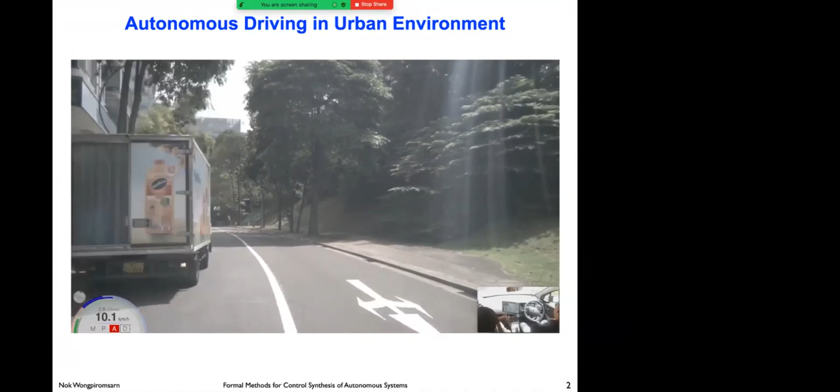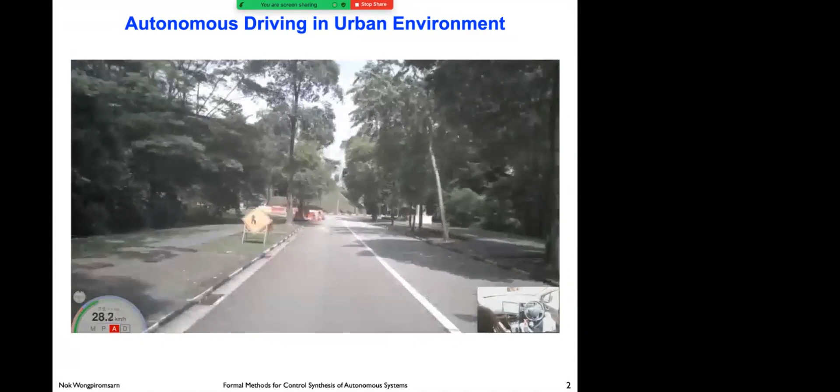And with an oncoming car that we need to yield for. So even with very light traffic, like what you saw in the video, there are already quite a number of interesting, complicated scenarios, like construction right in the middle of an intersection with a construction worker walking around. So we have to deal with all these complex situations.

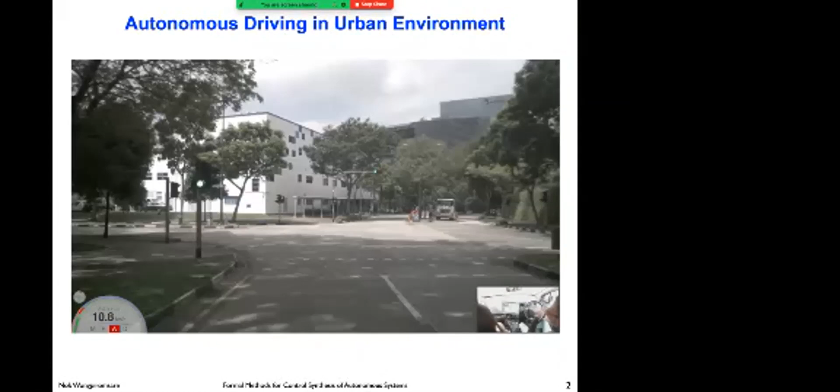And many more different situations that it will encounter. Now there are times that things do not go as well as in the previous slide.

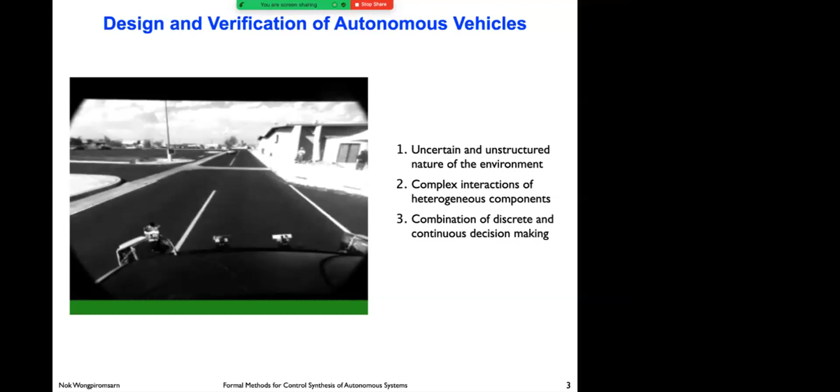Let me use the next video to demonstrate the challenges in designing autonomous vehicles, or autonomous systems more generally. This video was from the Caltech vehicle, Alice, in the Urban Challenge. I want to use this particular example, where she has to perform a left turn across busy traffic with a concrete barrier right after the turn.

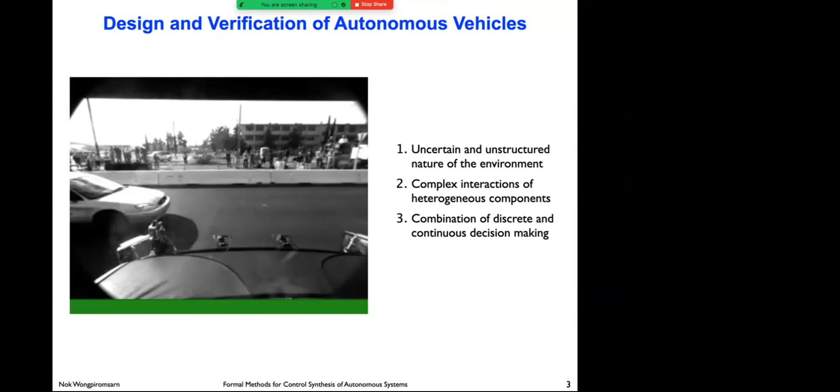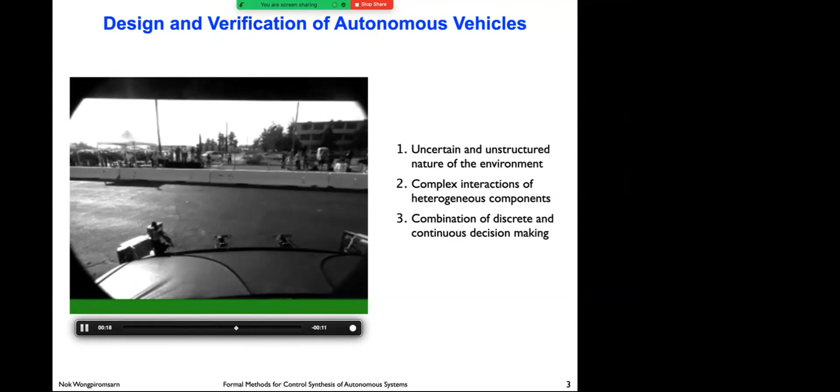You can see that the behavior she exhibits here is not quite ideal. The intersection is very busy, but she went through very slowly and at some point backed up right in the middle of this.

This illustrates what I would say are three main challenges of designing autonomous systems. First, uncertainties—the system has to deal with an environment that is uncertain and unstructured. What this means is there are a large number of scenarios that the vehicle has to handle.

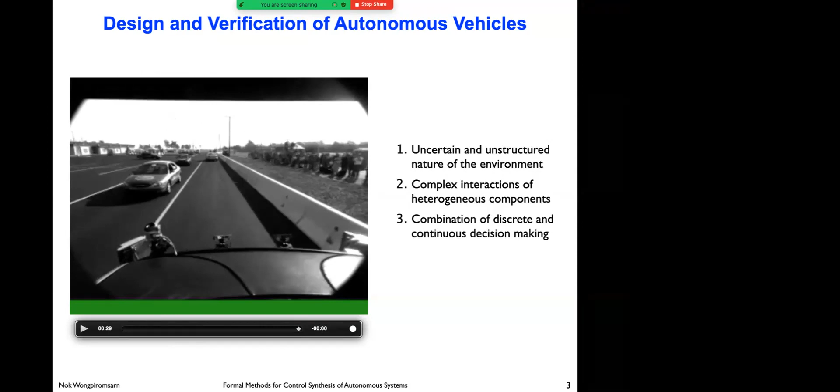In the case of Alice, we had tested merging, we had tested tight turns, we had tested driving next to obstacles—we just had not tested all of this in conjunction together. And you can imagine many other scenarios that you cannot possibly enumerate when you test the system. So that's the first point.

The second challenge is interaction. In the system we have many heterogeneous components—perception, planning, control, localization, and so on. Their interactions could be quite complex, and some of these interactions might only lead to bad behaviors under very specific scenarios.

This second challenge ties to the first a little, because there are so many scenarios we cannot test them all. So during testing, we might not detect all the bad behaviors that the system may exhibit.

In the case of the video you just saw, there were three components involved in the vehicle. We have the path planner that plans a path for the car to follow, and the safety system that would stop the vehicle whenever it deviates too much from the planned path and is about to run into an obstacle—a very typical safety system you even see in some modern cars today.

The last component is the steering control. In this case, we limit the steering rate at low speed to protect our physical steering system. If you think of these three individual components by themselves, each of them seems reasonable. It's just that in this particular scenario, they interact badly because the road the car has to turn into is narrow.

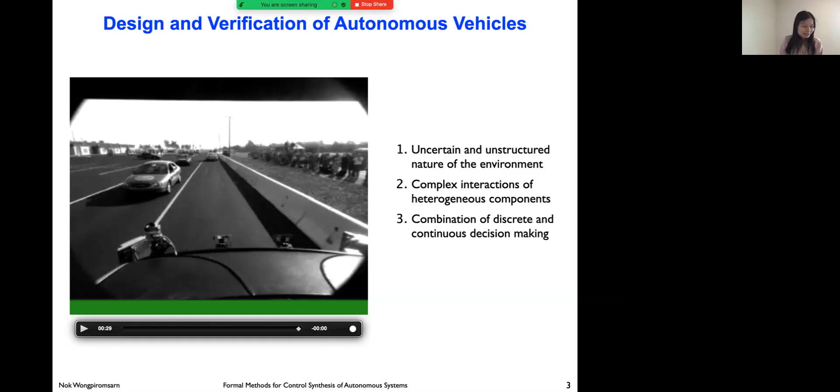So given that, even though the system is complex, we still want to be able to provide some guarantees, some correctness guarantees. With this, we look into applying formal methods.

We start with the model of the system, our own vehicle, and describe the requirements - what do we want the system to do. Besides this, we also need some assumptions about the environment. We might need to assume that other cars, to some extent, follow the rule of the road and do not try to just run into us. Otherwise we cannot leave our garage. So we need some assumption about what other agents could do. From this level, that is typically not formal, we try to formalize them into the system plus environment model.

This part describes all the feasible behaviors of the system. Some of this might not be desirable - for example, it is physically possible for a car to run into a person, it's just not desirable. On the other side, we have the formal specification. This formalizes what we want the system to do. Some of these behaviors may not be feasible, but they are desirable - like not running into a pedestrian could be the specification.

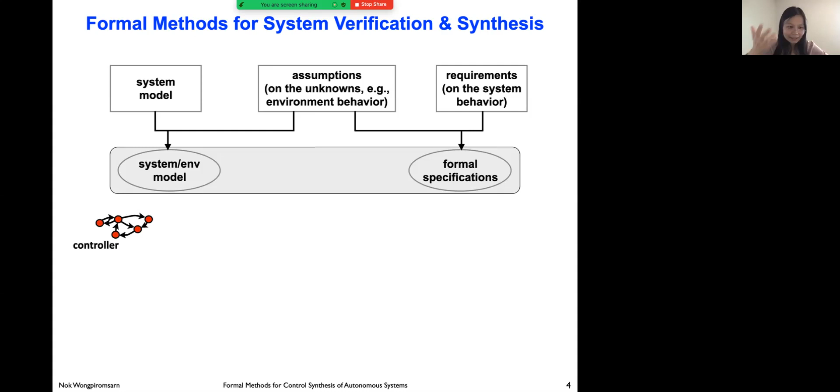Now, given the model of the system and the specification, we can, just like in the case of Alice, design the controller manually, and then we ask the verification problem: whether the composition of the controller and the system satisfies the specification. The answer we want from this process is either it's satisfied, in which case we get a certificate.

This is like when we want to prove whether a control system is stable - we can have a Lyapunov function, and that provides a certificate for the stability of the system. In this case we consider more complex properties, but there's the same notion of certificate. Otherwise, if the spec is not satisfied, the process could give counterexamples, so you can use that to debug the controller.

Now, what I think is a more attractive approach is synthesis. Instead of designing the controller manually, putting in all sorts of hacks like what we did with Alice, a better way is to ask: can we automatically synthesize this controller such that it, by construction, satisfies the specification? Or in case a controller does not exist - like for example our spec may say we want the car to go to the middle of the ocean, in that case it's just not physically feasible, so no matter how smart you are, you cannot find a controller to satisfy this spec. So this is a high-level description of formal methods.

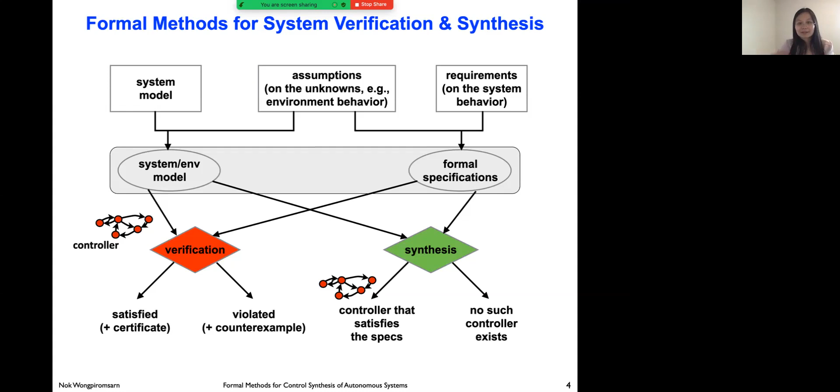Now let me go a little bit into detail of formal synthesis. This is where we want to construct automatically a controller that guarantees the specification is satisfied. I want to describe various formulations for synthesis, but instead of going into all the math and notation, let me give a very concrete example.

We have an autonomous vehicle here at the lower right corner - this is the system we are controlling. The car wants to make an unprotected left turn. There is an oncoming vehicle here that is not under our control, and also a traffic light - in this case it does not have a dedicated turn arrow. So we are making an unprotected left turn with oncoming traffic.

So given this system, one of the properties that we certainly want - we want to describe the properties or the behaviors that are correct. In this case we utilize a language called temporal logic, or specifically linear temporal logic.

In linear temporal logic, the basic building blocks are what we call atomic propositions. These are variables that can be satisfied at a given state. So here you see H4. This means human-driven vehicle, where H is in cell labeled 4.

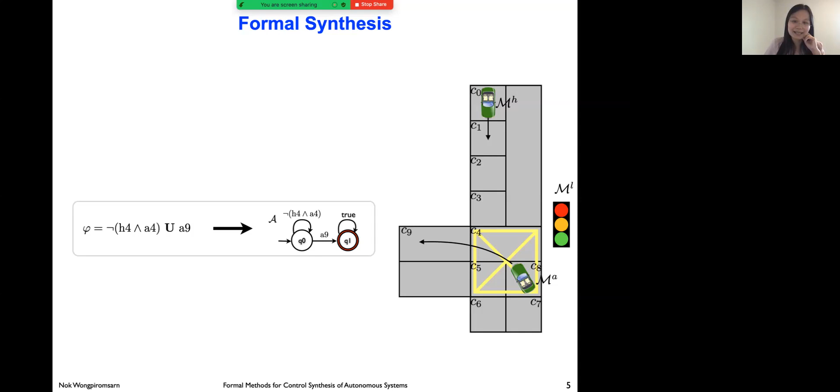So that means this oncoming vehicle is at this cell. A4, where A stands for autonomous vehicle, means the autonomous vehicle is also in C4.

We also use typical logical connectives like disjunction, conjunction, negation, and so on. So in this case, not H4 and A4 means there's no collision - the two cars cannot occupy the same cell in one state.

So far we only talk about a single state. The idea of temporal logic is that it extends this semantic to allow us to reason about a sequence of states. It adds temporal operators. One of them you see here, this is called the until operator. What this means is that whatever comes after until has to hold. So the autonomous vehicle has to be at cell 9 at some point in this sequence, and before it reaches cell C9, there is no collision between the two cars. This is what this formula is saying.

If you look into formal methods, then you know that there exists an algorithm to translate this into a mathematical object called a finite automaton, that is equivalent to this formula. I'll talk a little about this later.

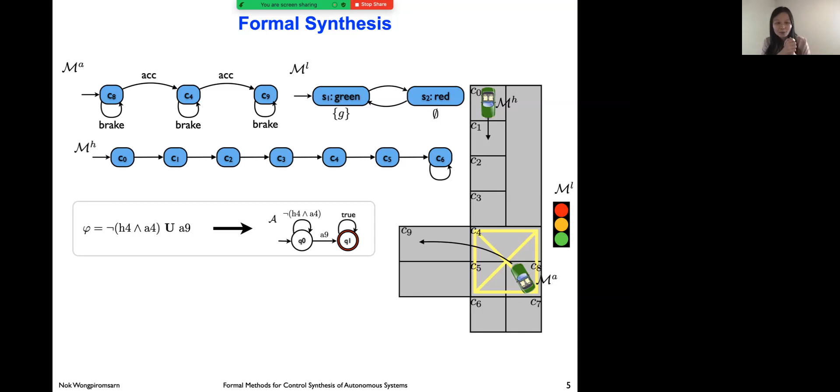So that's the specification. Now let me talk a little about how we could model our system. Depending on how we model our system, we arrive at different problem formulations. The simplest case is when we know exactly how the environment - in this case the human-driven vehicle and the traffic light - would behave. We know that the oncoming vehicle will just keep moving, moving to the next cell each time step, and the traffic light will keep switching between green and red.

The autonomous vehicle has two actions: accelerate would bring it to the next cell, and brake will keep it in the same cell. So in this case we have a deterministic system, meaning that once the autonomous vehicle chooses its action - acceleration or braking - the next state is uniquely defined.

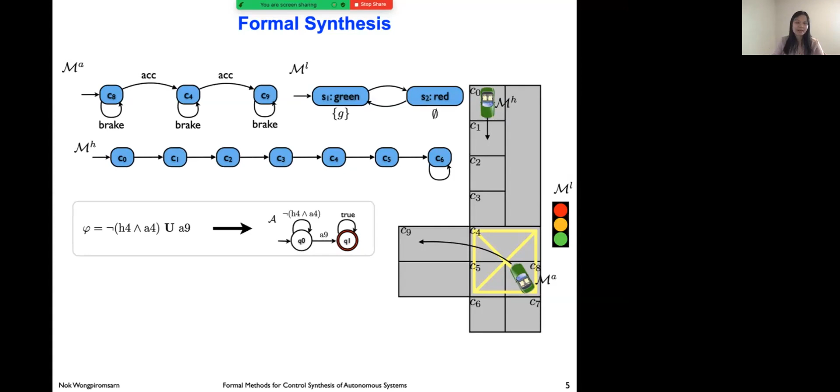With this deterministic system, we can formulate the closed system synthesis problem. The problem is to compute a policy or a controller for the system to satisfy the spec - we need to decide at each state whether to accelerate or brake, so that this spec phi is satisfied.

Now a more realistic formulation is that we don't know exactly how other agents would behave. The oncoming car would move to the next cell, or it could stay in the same cell in one step - we don't know exactly what it would do. So we would formulate a different problem, in this case a reactive synthesis problem.

Here we want to compute a policy so that the specification phi is satisfied regardless of what the environment does. Whatever actions the human-driven car or the traffic light choose in one step, we can guarantee that the spec will be satisfied. So this is more like a game formulation of the problem.

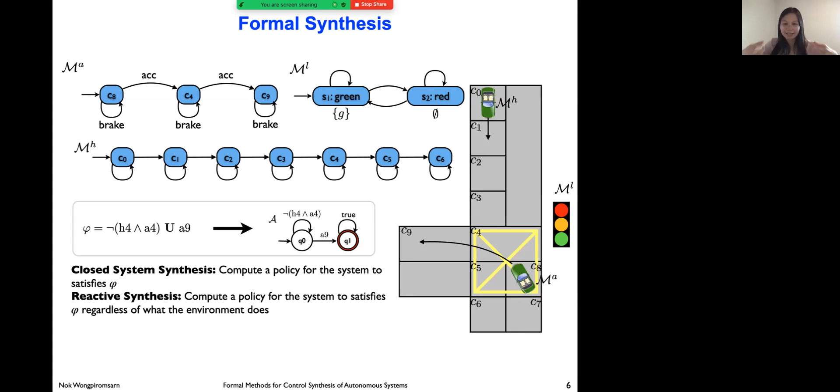Now the last formulation is when we know a little more about how the environment would pick their actions, in the sense that we can put a probability on each of the transitions. For example, we know that the human-driven car will move to the next cell with probability 0.8, and stay in the same cell with probability 0.2. In this case we could formulate a probabilistic synthesis problem, where the goal is to compute a policy to maximize the probability of satisfying the spec.

We can even extend this formulation to handle the case where the environment is not fully observable - we might not be able to observe the intent of the oncoming car. In that case, the problem would be maximizing the expected or worst case probability of satisfying the spec instead. So we have these different formalisms in different papers, and if you are interested you can take a look at this.

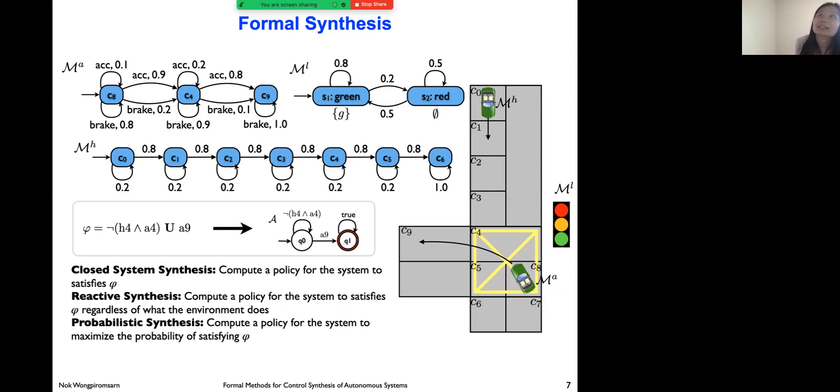Now, the major problem with all these previous formulations is that they treat autonomous vehicles as subject to many different rules of the road, and the problem is that in all three formalisms I described, they treat all the rules equally. It's either you satisfy all the rules, or if you break one rule, it's about as bad as breaking all the rules.

So what that means is if you already forgot to turn on your turn indicator, you might as well just run into a person. That's what the previous formalism would suggest.

So to account for unequal importance of traffic rules, we propose this notion of prioritized safety specification. It includes 4 elements. We have pi, which is a set of atomic propositions. This is like a typical temporal logic formulation.

Besides pi, we also compose these atomic propositions into formulas. In this specific case, I'll use FLTL. The syntax is exactly like LTL, but it is evaluated on a finite sequence rather than an infinite sequence of states. Each rule would correspond to one formula in this big phi set.

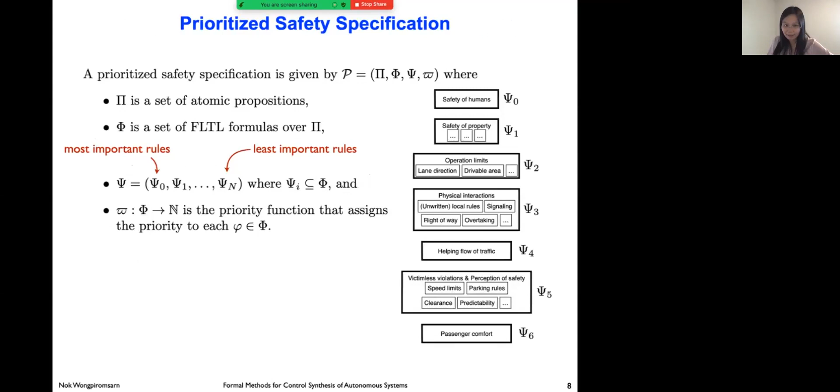Okay, so let me talk a little more about how we would describe the rules. I mentioned that we can use general finite LTL formulas. But as it turns out, if you go through the typical rules of the road, most of the rules are quite simple. We don't really need the full power of LTL to express those rules. So in this work, we come up with a subclass of finite LTL, and we call it si-FLTLGX formula. Si stands for stutter invariant.

Roughly what it means is that the correctness of the formula is not affected by duplicating a letter in a word or removing some duplicate letter. This is a very important property when we deal with continuous systems.

Besides being stutter invariant, we also consider that the formula has to be in a certain form - it's a safety formula. We use the always symbol. So from temporal logic, this square means p of x has to hold for the whole execution. We also constrain p of x to only contain p, which is an atomic proposition. We also allow next p, where p is an atomic proposition, and we allow all the typical logical connectives. These are all that we allow to specify the rules that we consider.

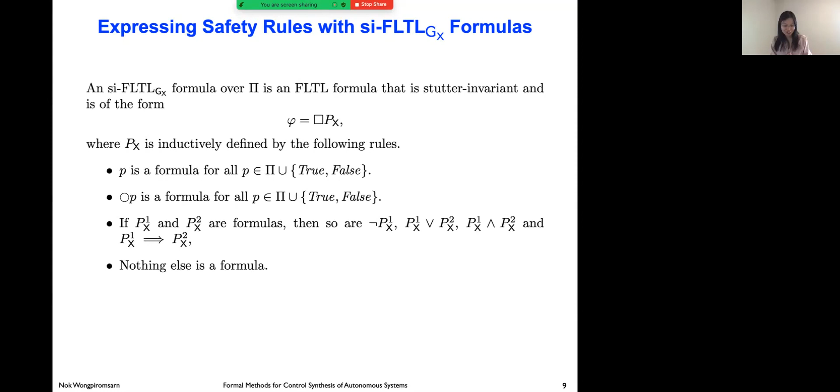All right, so I have talked about how we formalize our requirements. Now let me get back to how we model our system. We consider a dynamical system that can be described by a differential equation, x dot equals f of x and u, where x is the state and u is the control signal.

We have the notion of a finite time trajectory, which is a map from time instance to the state, such that there exists a control signal u that satisfies this differential equation. So this is a finite time trajectory.

To be able to reason about a trajectory, we also introduced the notion of a labeling function. The labeling function takes a state and returns the set of atomic propositions that are satisfied at that state.

An atomic proposition, an example would be, stay within a lane. So the state is within a lane. Given a single state, like a position and orientation of the rear axle of the car, we could determine whether the bounding box of the car is within a polygon that represents a lane or not. That's the labeling function, it takes a state x and returns the set of all the propositions that are satisfied at this state.

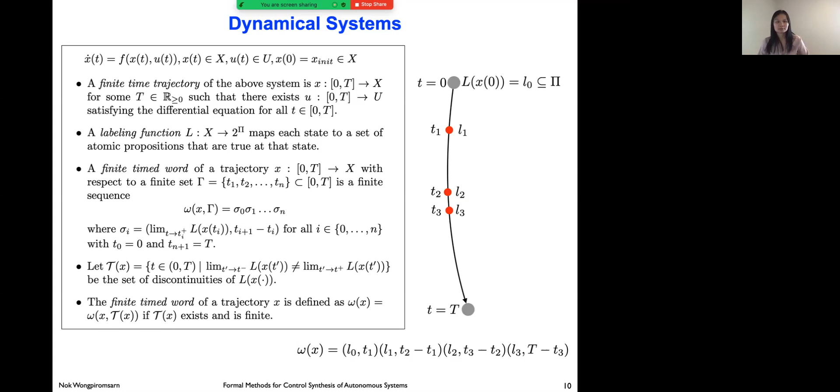So now that we've defined the notion of finite timed word, we can define, with respect to each si-FLTLGX formula, the level of unsafety, which is also the notion of the amount of violation of rule phi.

The formula is as follows: we go through this sequence and look at the consecutive pairs of labels. If they satisfy the formula, we don't penalize it, because it's correct. Recall that because PX only includes one next operator, it cannot be nested, so it's sufficient to determine the correctness of PX by only looking at two consecutive labels. So if the pair satisfies PX, then we don't penalize it.

Now if this pair violates PX and it corresponds to visiting an unsafe state, we would penalize it by the duration where this happened, the duration of Li essentially. And if it corresponds to taking an unsafe transition, we would penalize it by 1. So this is a very specific form of penalty. Later in this talk, I'll describe how we could generalize this to other forms of penalty if we want.

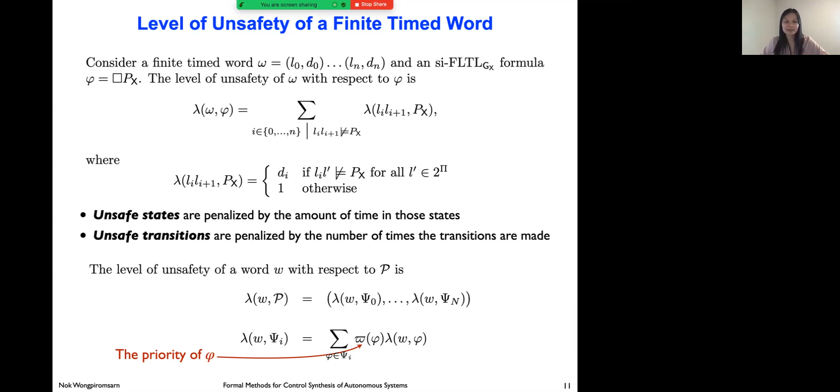Now we have all the elements we need to define the problem we call minimum violation planning. We are given the dynamical system, x dot equal f of x and u. We are given the label of a goal state, which we can think of as one atomic proposition in the set of all atomic propositions, so there could be multiple states we consider as our goal. And we also have a prioritized safety specification, with all the rules organized in a hierarchy.

The problem is to compute an optimal trajectory. What I mean by optimal is the first criteria: we want this trajectory to end in a goal state. At the final time of this trajectory, the goal has to be within the label of the trajectory at that time. That's the most important one.

The second criteria is that among all trajectories that end in a goal state, we want to minimize the level of unsafety with respect to this prioritized safety specification. The third criteria is that among all trajectories that end in a goal state and minimize the level of unsafety, we want to minimize the amount of time for the trajectory to reach the final state. So this is what we mean by optimality in this case.

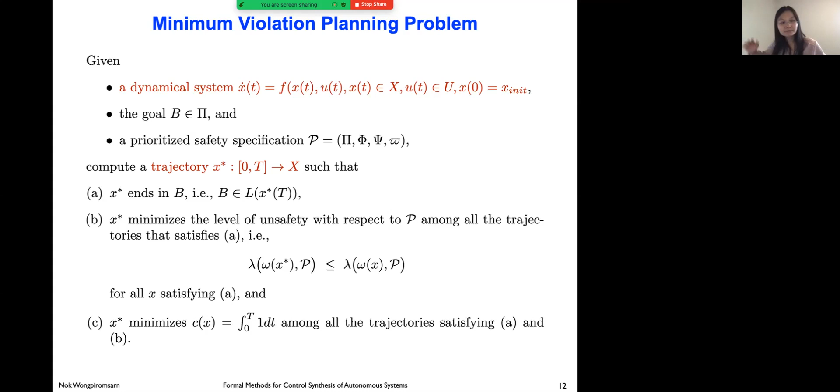Solving this problem involves two big challenges. First, we have a pretty complicated spec—not just safety, like invariant or stability as often considered in typical control systems. It considers traffic rules or rules of the road. The other challenge is that we have a system with an infinite number of states.

To solve this, we split these two challenges. The first thing we do is abstract our system into a finite state system. In the literature, there are two main approaches for doing this. The first is to rely on gridding the state space into a finite number of grids or cells, and each cell would correspond to one state in the finite abstraction. That means one state in the abstraction corresponds to an infinite number of states in the original dynamical system.

Another approach, which we call concretization and which I will utilize here, is based on sampling the state in the original state space, and building this abstraction based on these sample states. To make sure the abstraction is consistent with the original system, we need it to be simulated by the original system. That means if there exists a transition in this abstraction, there must exist a control signal in the original system that mimics this transition too. This is the notion of abstraction and simulation.

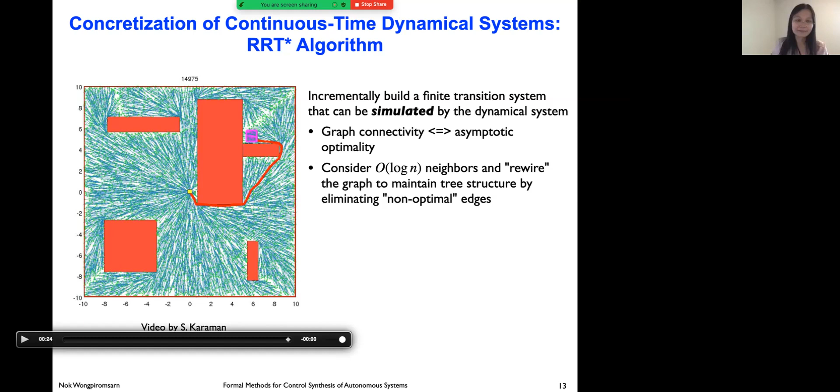Okay, so now how do we compose all this that I just talked about to solve the minimum violation planning problem? If you come from formal methods, the first thing we would think about is, let's just translate our LTL spec into a finite automaton. The problem with that is the size of the automaton in the worst case is exponential in the length of the formula. In autonomous driving, we have to deal with a large number of traffic rules, and if each rule is already exponential in length, composing them gives us a state explosion problem. So our solution is to avoid this problem.

Instead of doing this translation, we translate the original si-FLTLGX formula over pi, where pi is the set of atomic propositions, into an invariant formula, always P, over the product of pi. Here P is just a proposition, and this always-P becomes an invariant formula, which is much easier to deal with, since we don't have the next operator to take care of anymore. This translation is quite simple: we replace each instance of P in the original formula by a pair (P, true), and we replace each next-P with (true, P). So now our formula will be over pi times pi.

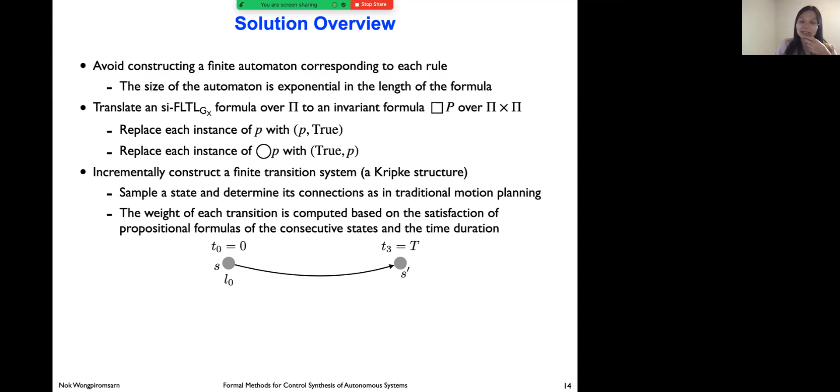In typical motion planning, the cost is basically either the length or the time. In this case, we want the cost to reflect the amount of violation of the rule. So we know the end time of this transition—that's just typical motion planning. What's additional is we need to look at the labels along these transitions. We start with the label of the first state, figure out along this transition where the label or properties of the state change, and mark those time instances. When we compute the violation subject to a particular rule, we look at the consecutive labels.

If the label pair, Li, Li plus 1, satisfies P—now P is just a propositional formula—if this is satisfied, we don't penalize it. If this corresponds to visiting an unsafe state, we penalize it by the duration, and otherwise we penalize it by 1. This definition corresponds exactly to the definition of level of unsafety we defined earlier.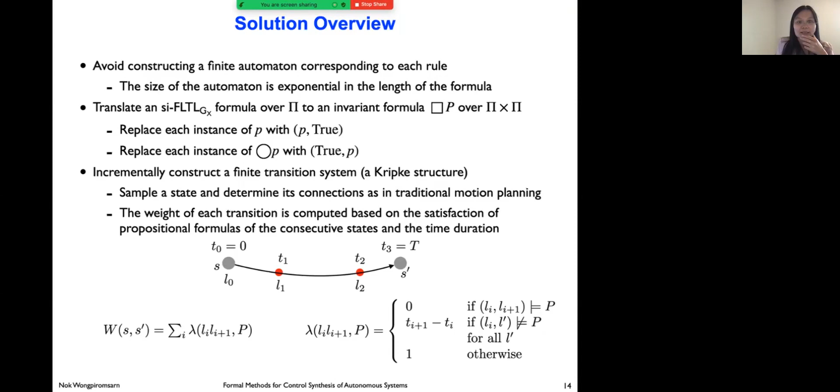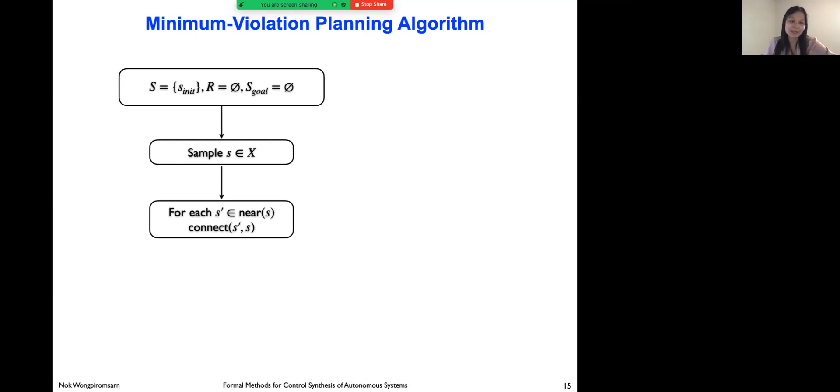Now let me give a high-level overview of the algorithm. We start with the initial set of states being just the initial state, no transitions, and no goal state yet. We sample a next state, a new state S. We connect from an existing state S' that is in the O(log n) nearest neighbors of S, and we connect S' to S. The next step is we connect S to S'.

So that's the reverse edge. If we just want to use RRG, connect mainly just creates a transition—so connecting S' to S means creating a transition from S' to S, and here creating a connection from S to S'. Now, if you want to use RRT* instead, to make the abstraction lighter with fewer transitions, we will only add a connection if it actually improves the cost, and we also need to consider rewiring.

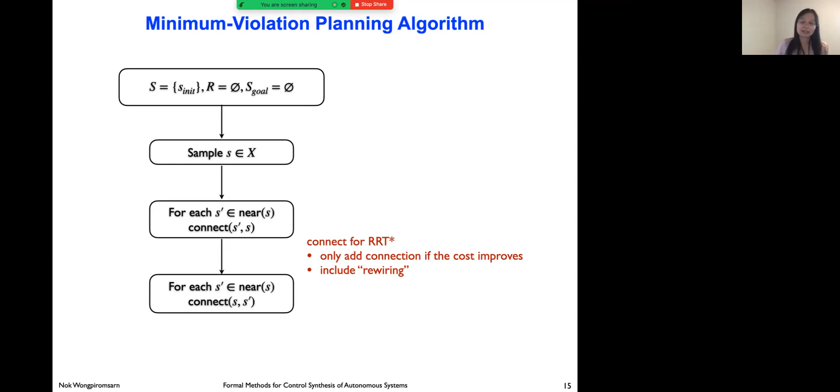The final step is to update the set of goal states in case the new sample state belongs to the goal. We can just keep going through this loop until we run out of computation time, and at the end we extract the optimal path from the graph we have. So that's the complete algorithm.

And as I said, because this connect operation can be defined generally, you can have this part as the template of the algorithm, and then you can define a version of connect for RRT* and another version for RRG.

And that would give you the flexibility of which algorithm to use.

Let me discuss the theoretical guarantee we can provide. As in the RRT star or RRG case, we can ensure asymptotic optimality if P is a propositional formula. So if we start with just the invariant property, we can ensure that the optimal solution from the abstraction converges to the original solution with probability 1.

The other property we can prove is the computational complexity. Assuming that computing the label is O(1), the algorithm has exactly the same computational complexity as RRT star and RRG, that's O(n log n). Because RRT star and RRG have demonstrated to run very efficiently in real time, it's easy to implement our algorithm to run in real time as well.

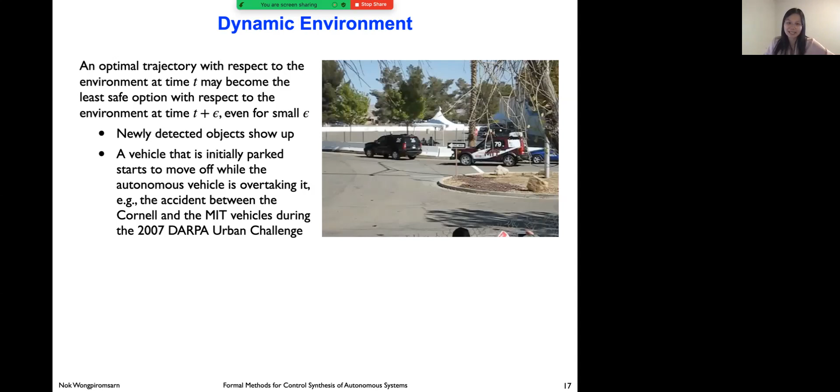This could happen, for example, when newly detected objects show up. Or a real case that actually happened and caused the first accident between two autonomous vehicles is that a vehicle that was initially parked started to move off while an autonomous vehicle was overtaking it. You can see in this video, originally the optimal trajectory is to get back into the lane, but then the parked car starts to move, and so getting back into the lane would be one of the worst things you want to do, because that would lead to a collision like what you saw in this video.

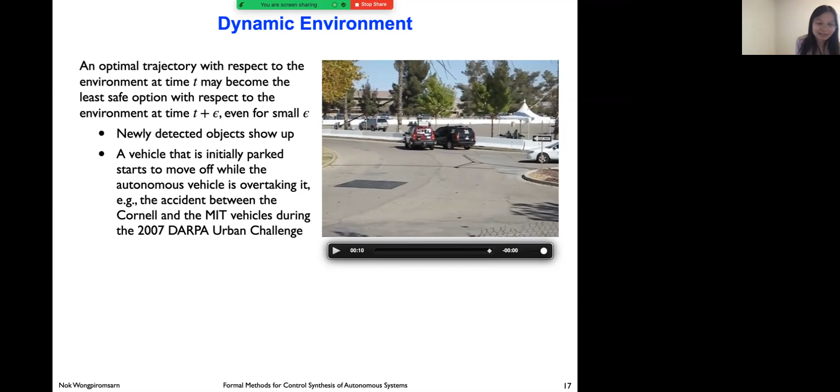By applying the minimum violation planning, and because it's quite efficient, we can do real-time replanning in response to a quickly changing environment. We keep evaluating our environment and keep adjusting our trajectory. So to some extent, this approach is better at handling unexpected or unmodeled environments compared to other synthesis techniques like reactive or probabilistic synthesis.

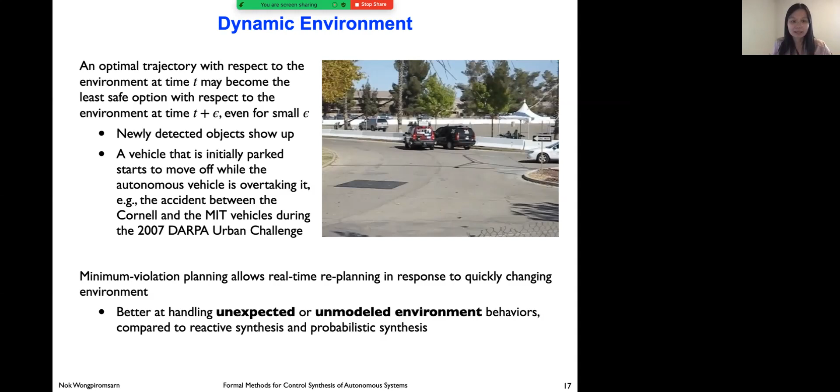To be able to enjoy this benefit of real-time replanning, one of the properties we want to ensure is the richness of this abstraction, the richness of the graph. We want to make sure that we maintain many different options in the graph, instead of just the optimal one, because the trajectory that is optimal now may be the worst trajectory in the future. So we want to make sure that the options in the graph are diverse.

And we don't have infinite time for the system to converge to the truly optimal solution, so we have limited computation time. Instead of reconstructing the graph every time the planning cycle runs, we maintain the graph from the previous iteration, but we need to update our initial state to correspond to the current state. And we update the transition cost based on the current state of our own vehicle and also the most recently observed environment, whether the parked car is moving or not.

In practice, RRG-based algorithm would be more preferable, because RRT star only maintains optimal edges, but optimal edges at time t might not be optimal anymore at time t plus epsilon. So RRG is often better in this case in practice, even though it needs more time to construct and maintain.

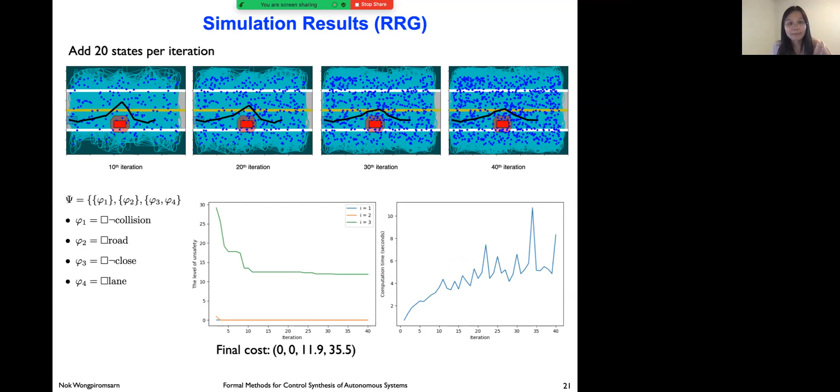Let me summarize the 4 different formal methods approaches when applied to autonomous systems. Closed system synthesis deals with deterministic systems. Probabilistic synthesis and reactive synthesis - one deals with probabilistic systems and the other deals with a non-deterministic adversarial setup.

Minimum violation planning deals with deterministic systems, but relies instead on real-time replanning to respond to changes in the environment. Here we want to minimize the amount of violation. In other cases, like closed system synthesis, we just want to satisfy the spec. In probabilistic synthesis, we want to maximize the probability of satisfying the spec. Reactive synthesis is where we want to satisfy the spec regardless of what the other agents are doing. So as I mentioned, the one key benefit of minimum violation planning is its online, any-time nature, which allows it to respond quickly to changes in the environment.

Whereas in other systems, like reactive synthesis, we need to rely on having an accurate assumption on the environment behaviors—how the system or the environment could make the transition. And we also need to make sure that the spec is realizable, meaning whatever the environment does, there must exist a strategy for our system to satisfy the spec. And probabilistic synthesis relies on having an accurate probabilistic model.

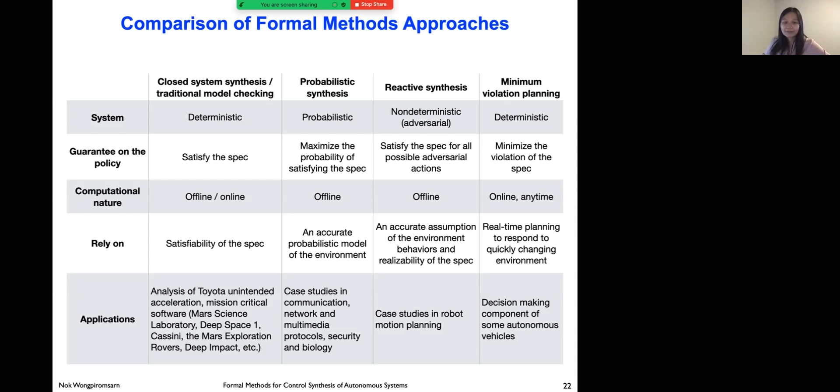So that's some past work. Now let me end the talk with some future work. We go back to the very fundamental assumption of formal methods. If you recall from the earlier slide, formal methods rely on having a formal model as well as the spec of the system. In many cases, this is not quite the case. So let me talk about the specification side first.

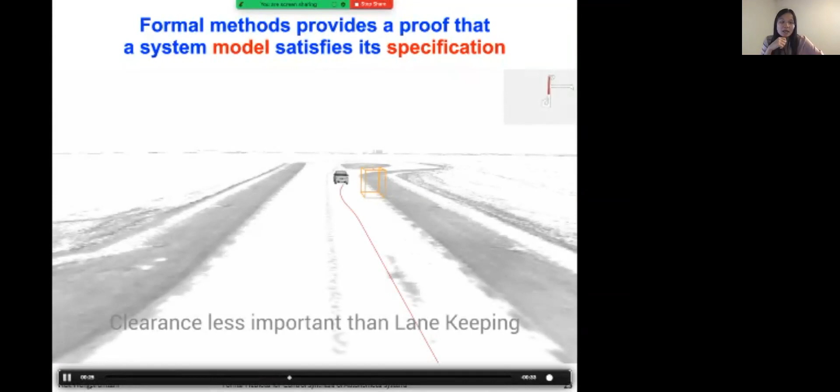Let me give you this very specific example again, the overtaking problem—I spent a lot of time on this. One option for the autonomous vehicle is to violate the lane rule but give enough clearance to the parked car. The second option is that it tries to squeeze within the lane, but that would mean it violates the clearance rule. The question is, which of these behaviors is correct? And how do we even put all these rules into the right hierarchy?

So that's one of the first challenges: how do we formalize each of the rules? What exactly does it mean for a car to stay within lane? I originally started with this very simplistic assumption—okay, we have the footprint of the car, we know the lane geometry. Stay in lane just means the footprint is within lane.

Obviously, this simplistic view of the world is not quite right, especially in Singapore where the road is quite narrow. You'll see that the bus, all the time, does not stay within the lane—its footprint just cannot be within the lane boundary. But if you ask anyone whether the bus violates that lane rule, people will say no, they just drive as good as anyone could. So formalizing individual rules, as well as their importance, is still quite a question.

Now that's the specification side. The other side that is as challenging is how do we model the system. Typically this autonomous system would consist of the perception side and then the planning control that the talk focuses on. And we speak very different languages.

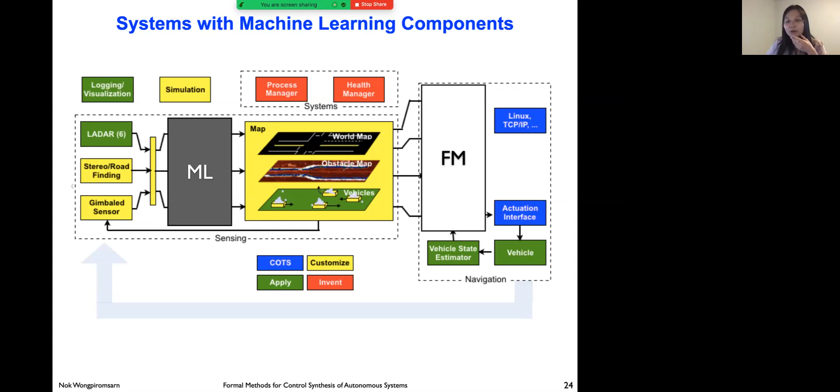Nowadays many of these perception components rely on machine learning approaches, and typically the kind of metrics you get out of this approach are precision, recall, and so on. How do we combine this knowledge of the machine learning component to model the complete system, or the input to our formal methods component? Or what if the whole system is built using end-to-end machine learning? How do we even model this complete system? That's also quite an active area of research.

Another problem I want to mention is the combination of the two: the model and also the specification. There's an argument that because autonomous vehicles are safe and cautious, they should improve the safety of transportation. That might be true if you consider just accidents caused by the autonomous vehicle itself.

But because of the way it drives—if you look around, there may be a number of people who don't follow traffic rules strictly—now you are introducing an autonomous vehicle that tries to better follow the rules of the road. Now you are introducing some inconsistencies between different agents in the system. And it's not clear whether strictly following the rules of the road actually benefits the overall network in this case. So that's another line of research that I think is quite interesting.